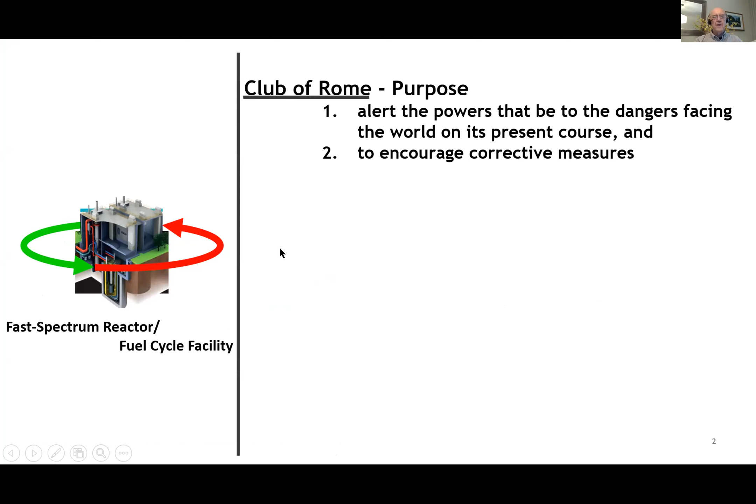I had to actually look up what the Club of Rome was and what its raison d'etre was, and there seem to be two aspects. One is to alert the powers that be to the dangers facing the world on its present course, and second, to encourage corrective measures. Now, I looked at and listened to a good number of talks, and it seems that the emphasis is more on number one.

Adam Fenech just last week talked about climate change and says we're screwed, there's nothing we can do about it. That seems rather dire. And Ruben Nelson, about a year ago, I think, talked about civilization overshoot, and the path that we're on is literally path to death of the world as we know it. Bill Rees, maybe about a month or so ago, talked about something similar, about civilization being the death of us.

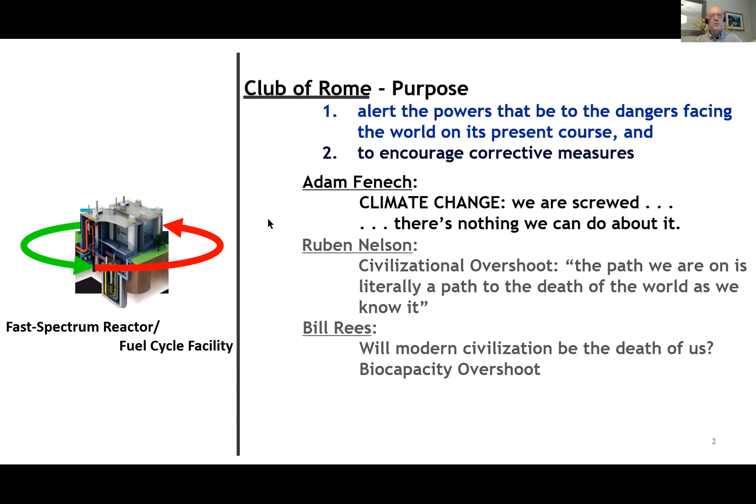And so I think I'm there as a foil, really, because I'm supposed to talk about number two, to encourage corrective measures. Fast spectrum SMR technology is sort of a neat way to get into it gently and to combat climate change in a massive way. And I would say, picking up on Bill Rees, that it's a quantitative substitute for fossil energy, except Bill Rees had already said, well, a quantitative substitute for fossil energy will simply deplete the planet.

And I think he meant of other resources. And so even that was turned into a negative. So perhaps what I can offer Bill is time, perhaps centuries of time where we as mankind can gather some wisdom before we die.

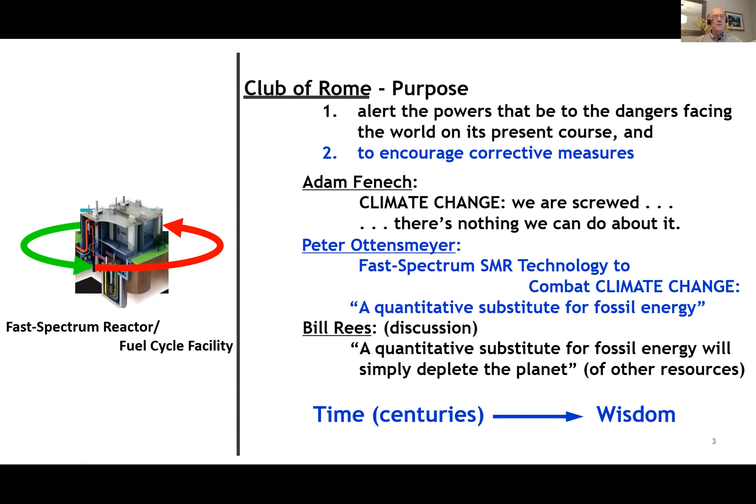So the outline of my talk is really talking about uranium, perhaps in a different way than you imagined, and about energy, because energy permits us to do things. And I've looked at energy really in three eras or ages over the last 4.5 billion years. There's the past, which was carbon neutral. And then for two centuries, we've really dug into fossil carbon. And hopefully the future will be relatively carbon free.

And SMRs, small modular reactors, and nuclear energy, I think, is the way to go to handle all of those problems. And I'll talk about slow neutrons and fast neutrons. What makes it possible really is what we call nuclear fuel waste. If we recycle it, it gives us a tremendous amount of energy.

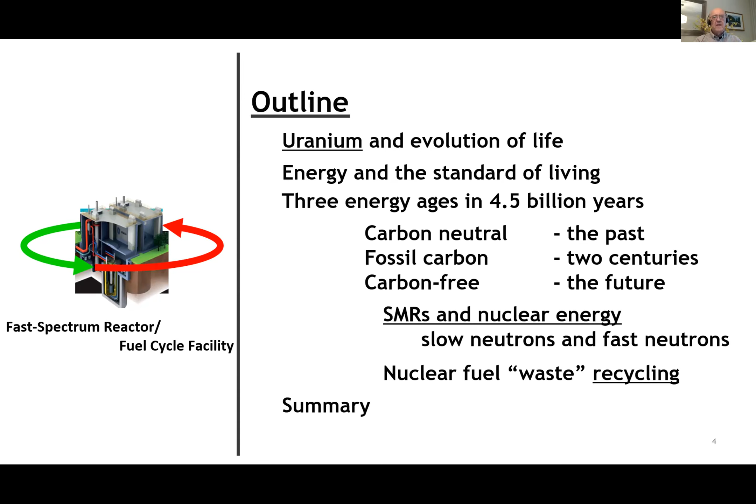Now, since some of it may be technical, I thought I'd start out with giving you the take-home message right away so that you can sign off and still have this ringing in your ears. You may or may not know that nuclear energy is really non-carbon energy, or very low carbon, non-carbon if you've already dug the uranium out of the ground, because all you're doing is putting it into a reactor and creating energy, and there's no carbon involved.

Now we've got 60,000 tons of used nuclear fuel, commonly called waste, but it's still 99.26% fuel, because we've only used about 3/4 of a percent of it to extract energy. Now, in some fast spectrum reactors, including SMRs, we can use the rest of it. And that helps us create over 5,000 years of non-carbon energy at the current nuclear power levels that we're using in Canada. And that avoids emitting 560 billion tons of CO2.

Now, if you don't know how much that is, about 3 trillion tons of CO2 are in the atmosphere. So this is about 18% of the CO2 just in the Canadian nuclear waste alone. Now, if we want to increase our power levels, then to replace, say, fossil energy in Ontario, we can do that for about 800 years.

And if we want to tackle all of Canada with that nuclear waste, then we can replace Canada's fossil energy for about 300 years. I think that's worthwhile going after. And the lovely thing is that the technology exists, has actually existed since 1951. The first electricity ever produced by nuclear power was in one of these types of reactors. And we've already accumulated $10 billion for nuclear waste management, which we can use as starting funds to go in this direction. So it's possible.

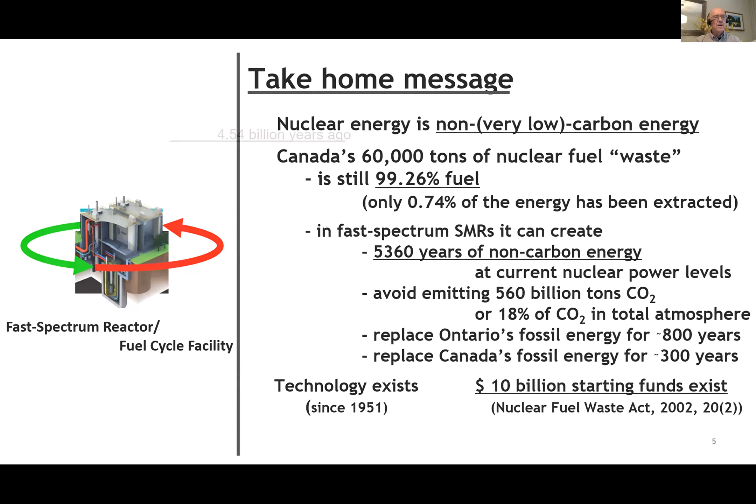But let me start at the very beginning. About 4.5 billion years ago, the Earth was formed from the fragments of some supernova explosion that sent bits and pieces of itself through space, and it glommed together to create the Earth. Now those rocks crushed together and created a tremendous amount of heat in the process. And so the center of the Earth now is actually at 5000 degrees, but it's still solid because the pressure is so great. It's surrounded by a ring of liquid iron and nickel. And then beyond that, we've got rock.

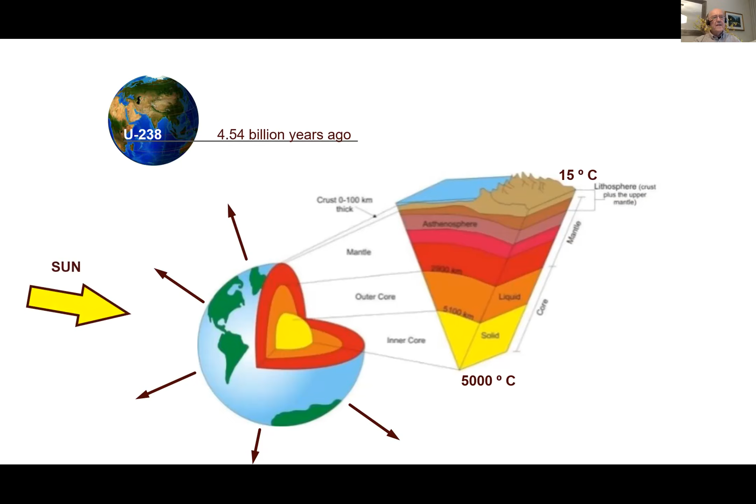And the temperature, of course, changes towards the outside, and it's about a lovely 15 degrees, which is good for life on the surface. But the Earth emits that energy, that heat, into space. And if it weren't for the sun, we would have sort of an icy surface. But even the sun is not enough. And what keeps it at that Goldilocks temperature really is the decay of uranium-238 and a bit of U-235 and so forth.

I'll just move your picture away so I can see what I'm doing.

That decay emits an alpha particle, which is really nothing more than a helium nucleus, like in kids' toys. And it emits about 3.3 million electron volts. Now, to compare that, a carbon combining with oxygen to give you heat gives you about 5 electron volts. So this is 1 million times more than that. So it's a tremendous amount of heat. And even the 4 parts per million in the crust is sufficient to do that.

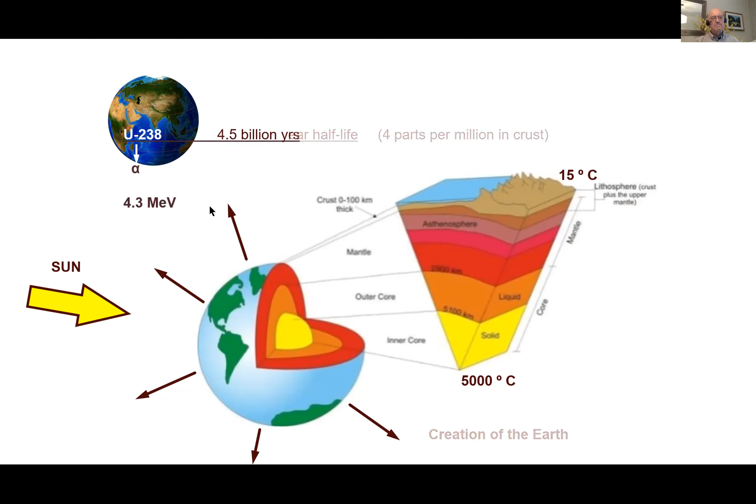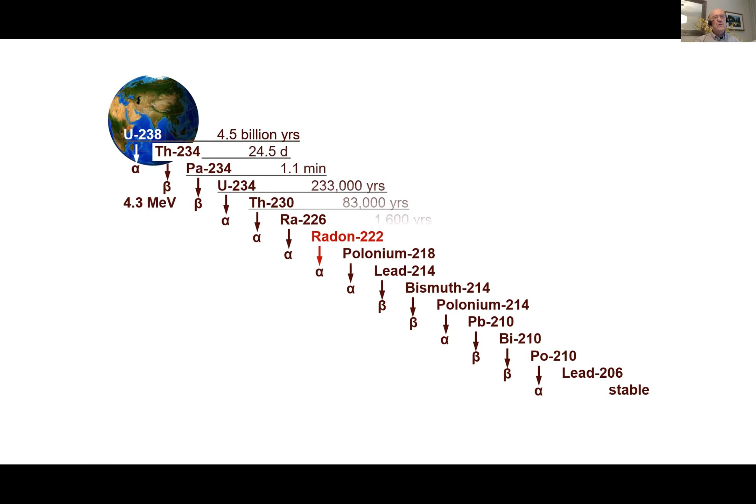Now, uranium is not alone, because in doing that, it becomes thorium, and then it becomes protactinium, and then uranium again at a smaller version, thorium and radium and radon, and so forth. It goes all the way to lead, which is stable, emitting energy all the way along. It doesn't do that immediately. It takes about 300,000 years, because there are some real laggards in there. The uranium and the thorium-230 together require about 300,000 years before this moves on. And so a single uranium disintegrating into something smaller takes about 300,000 years to become lead. And that's been happening for 4.5 billion years.

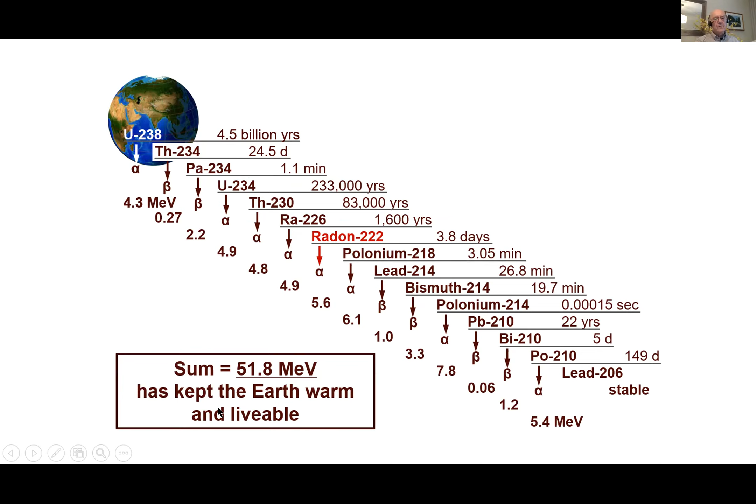Now, each of these, as they decay, also emit energy. And so altogether, we've got enough energy to keep the Earth warm and livable. And that's uranium. And if you think of geothermal heat, that's uranium as well. It's this chain here that gives you the geothermal heat. So it's radioactivity, you might say.

Now, in the middle, of course, there's radon, and you say, oh, radon, that's dangerous. It's in our basements and so forth in our houses. Well, it's been there for about 4.5 billion years. And we've evolved in that radioactivity, in the sea of radioactivity. And we've evolved defense mechanisms that keep us alive, because obviously we are alive today.

Now, if we look at it as a physicist, then today is right there. And then going backwards, the Earth was formed 4.5 billion years ago. The uranium we have now is about 99% U-238 in the total uranium and about 1% U-235. And 4.5 billion years ago, that's a half-life of U-238, there was twice as much there. So over the time, we've lost half of the uranium. And of course, it's going to be half again in another 4.5 billion years. But that was enough heat to evolve life.

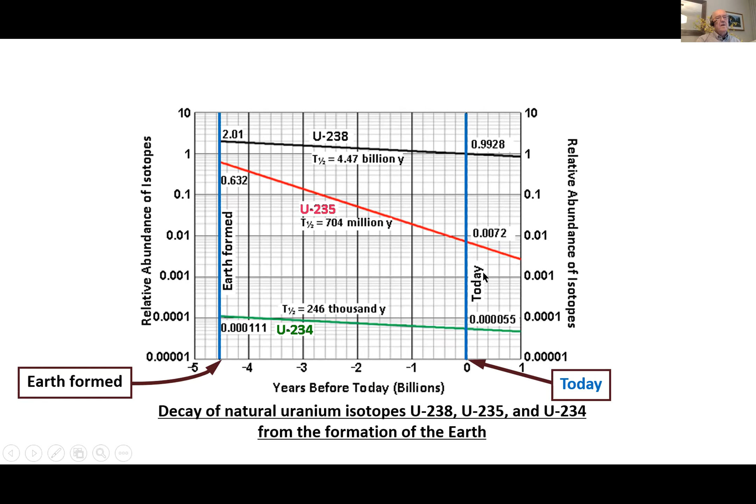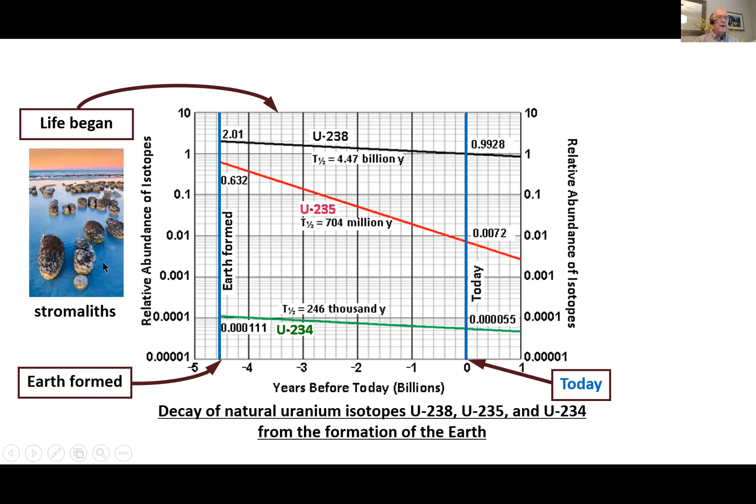Life evolved about a billion years after the Earth formed. And we've got evidence of that in rocks near the ocean. Australia, for instance, Shark Bay is a good place. And it's sort of like corals that have grown, because it comes in layers and layers and layers of cells that glom together to form, like I say, something like corals.

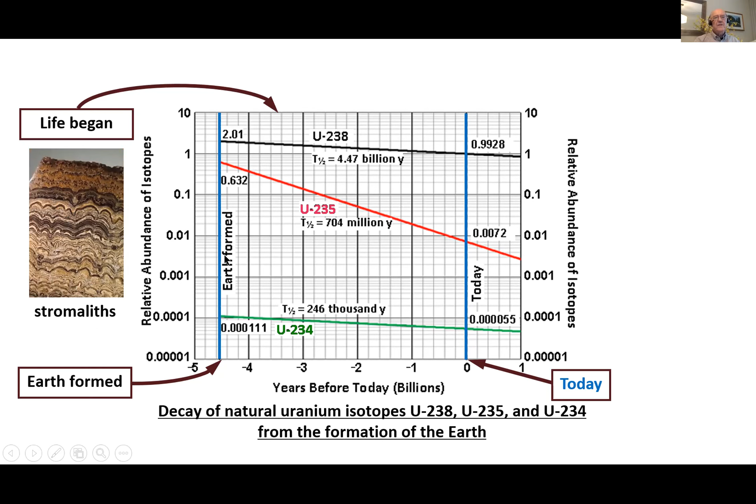Mankind actually is a rather recent arrival, because we evolved into something called man just fairly recently on this time scale. And so you might say our existence is due to those lovely conditions that uranium caused on the surface of the Earth.

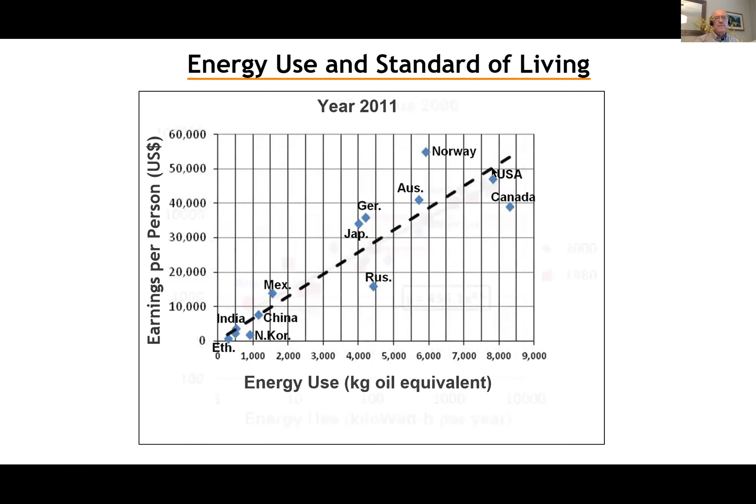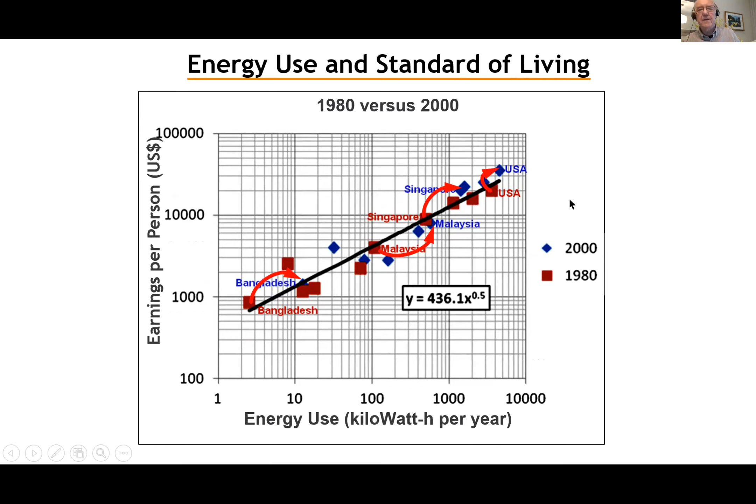Here are some nations, Bangladesh and Malaysia and Singapore and so forth, which in 20 years increased their use of energy and increased their so-called standard of living for each of them. And even the USA improved in 20 years there, between 1980 and 2000. But that's been happening for eons.

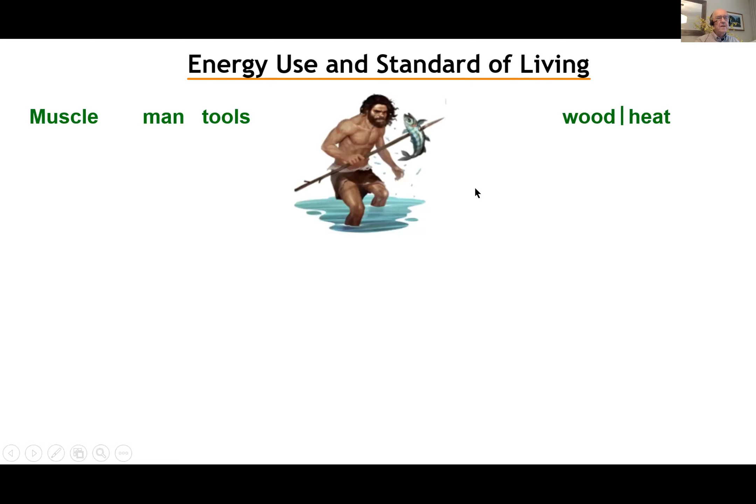And our good man here, all he had really was his muscle energy to start with. But he also had a brain, and that brain evolved tools, and his standard of living went up because of it. But then he realized that if he multiplied his muscle by using animals, his standard of living would increase again. And when we invented machines like ramps and levers and wheels and wagons and gears and winches and blocks and tackles, our standard of living just soared.

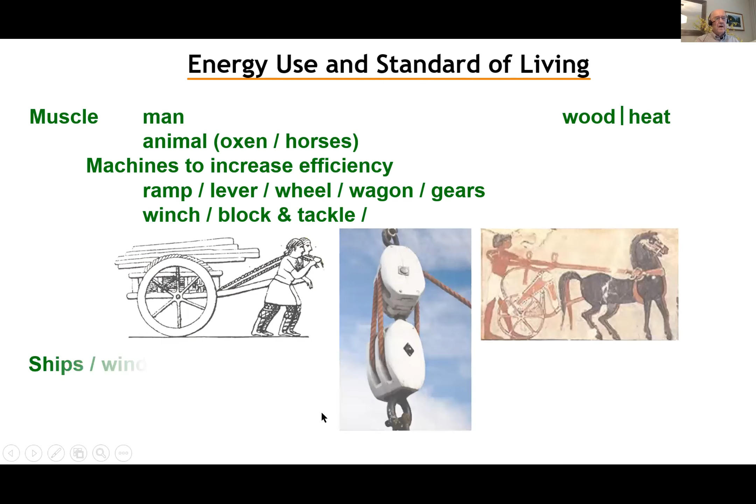I like blocks and tackles because I'm sort of a nautical person. Because it let us build ships and windmills and water wheels, and life just became lovely. I mean, it's almost nostalgic when you see these sailing vessels there using wind power. Well, it was dangerous,

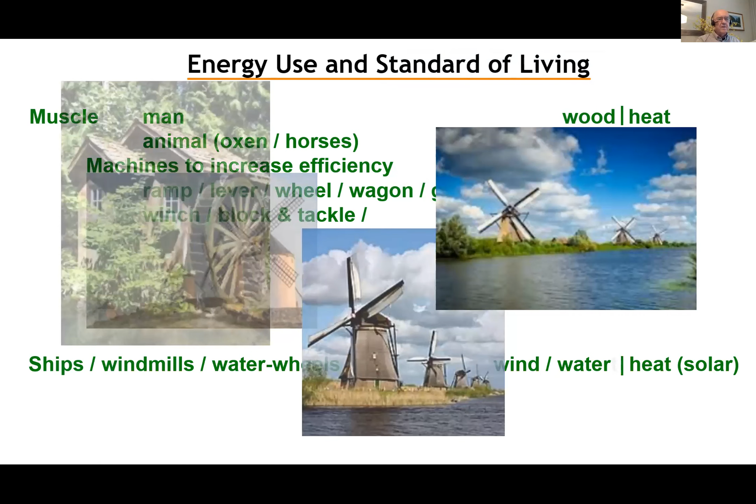but windmills have been around for a good long time, and we're trying to go back into that with what we call now turbines, and water wheels are just lovely to play around with as well, and they gave us our motive power, and that was all in what I call the carbon neutral era.

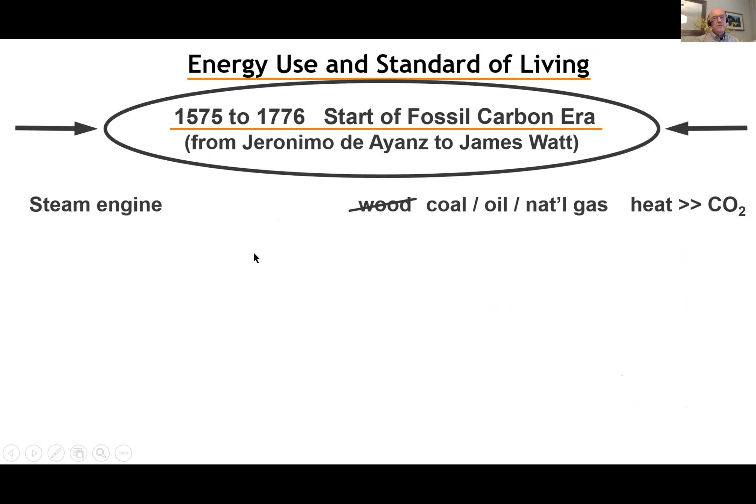And that ended somewhere around 1500 to 1800, because somebody used their brains, in Spain Jeronimo de Ayanz and James Watt in England, to invent the steam engine. And that changed our life. Wood wasn't good enough, we used coal and oil and natural gas and so forth, and we conquered the world on land.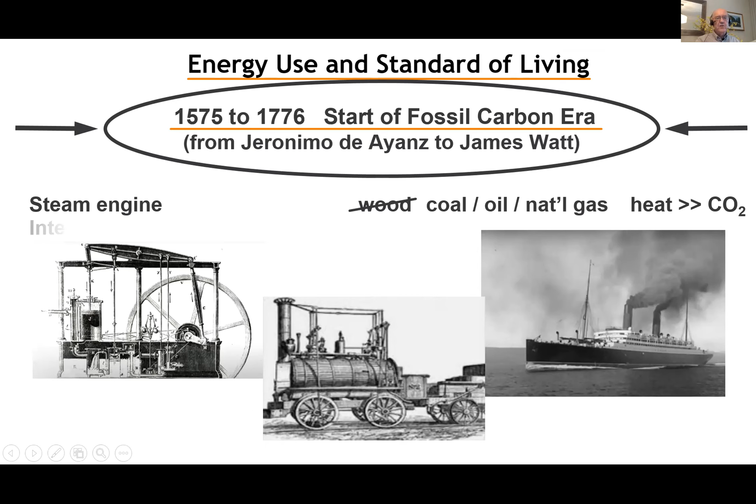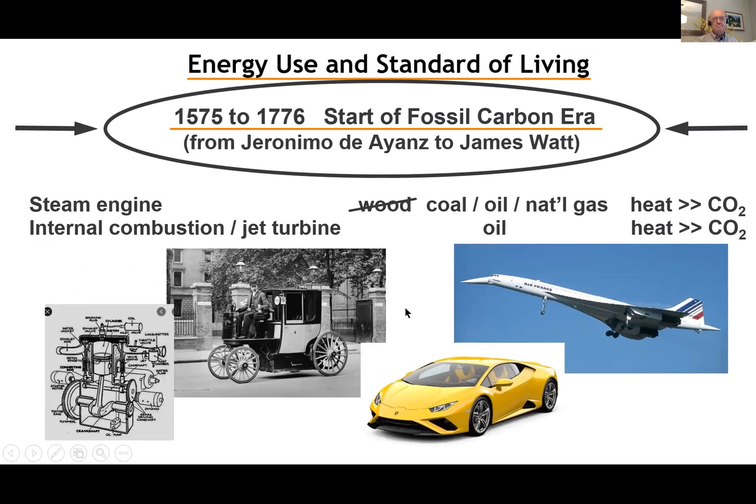It went faster. We invented the internal combustion engine and the jet turbine and so forth, and we flew into the air. That's the Concorde, if you remember that far back. And you figure when we invented electric motors, then things should get better. Well, a little bit if we use hydropower, but most people don't have hydropower, and so they create electricity with coal and oil and natural gas.

And all of that, of course, emits carbon dioxide. How much have we emitted into the atmosphere since the 1800s, since James Watt's invention? Well, there are tables that you can look up for each country and so forth. And the world altogether by now emits about 35 billion tons per year of CO2 into the atmosphere. And altogether, since the 1800s, we've emitted close to 2 trillion tons of CO2.

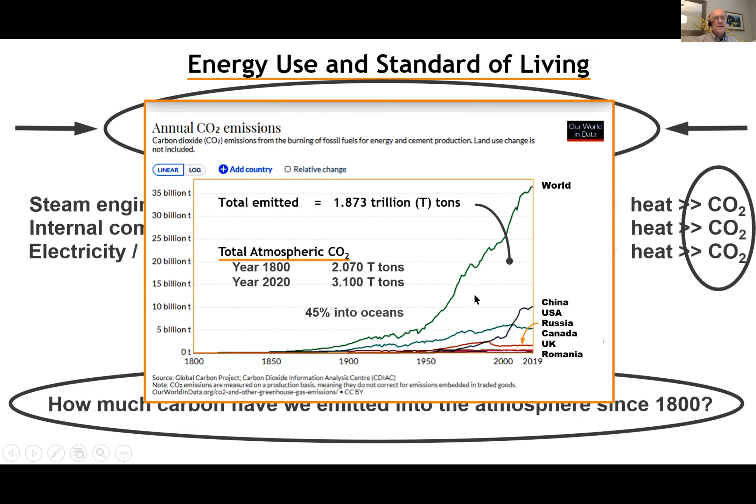Now, is that a lot? Well, in 1800, the entire CO2 content in the atmosphere was about 2 trillion tons. By 2020, it was 3.1 trillion tons. You figure, well, it should be 4. Well, the rest of it went into the ocean and acidified the ocean. And so we started thinking about that and wondered whether it had ever happened before.

Well, obviously there were some sort of natural phenomena where the CO2 went up and down and the temperature sort of followed in concert, but nothing has happened that's as drastic as what's happened recently. And so instead of Homo sapiens, which arrived somewhere around 200,000 years ago, now we've got maybe Homo insapiens, or if we want to be kind, we'll call him Homo carbutilus, like carbon user.

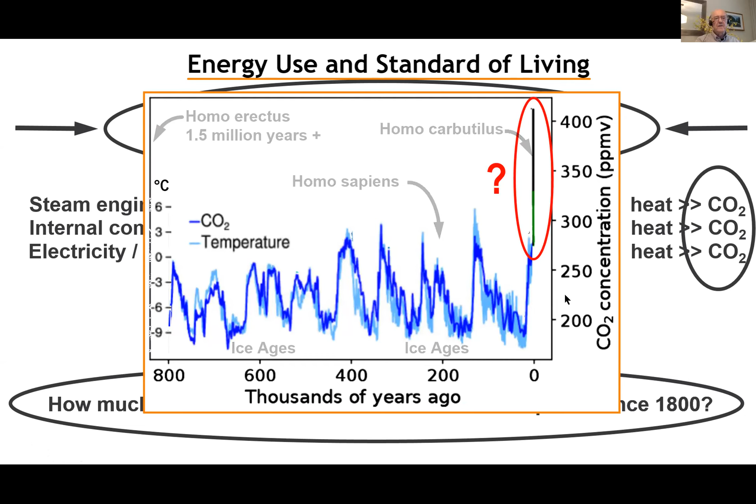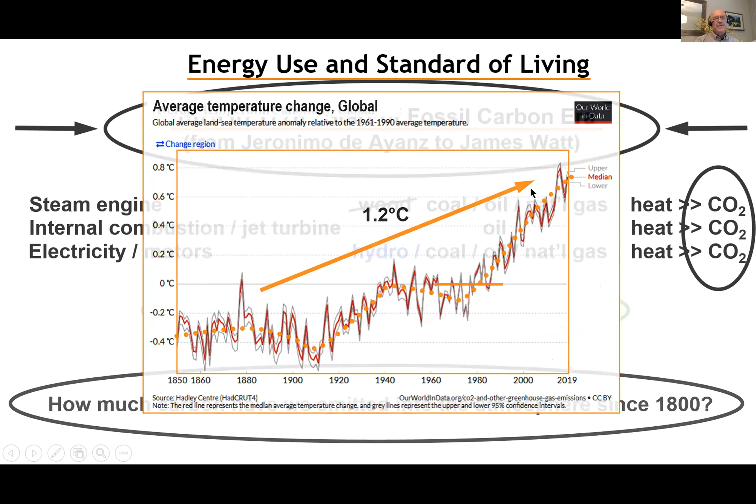And the Germans invented this word, Energiewende, or energy transition. And you think that Angela Merkel was the instigator of this. Well, it actually happened 30 years before her. She called it Energiekonzept. And the idea was that you would do away with carbon, but really the German population was after doing away with nuclear.

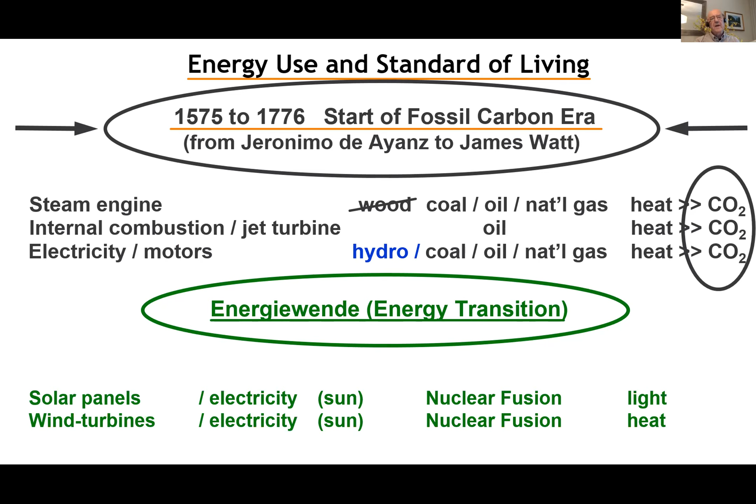And so in the process, they've been spending about 35 billion euros per year over the last 10 years. And the effect was to lower their carbon emissions for electricity from about 500 grams of CO2 per kilowatt hour to about 400. Ontario, in the meantime, is down to 31 grams per kilowatt hour.

So we're doing rather well, and we do that primarily on the basis of nuclear fission. 60% of our electricity comes from nuclear fission from our reactors. Now, nuclear fission is a relatively new phenomenon in the greater scheme of things on that geological timescale.

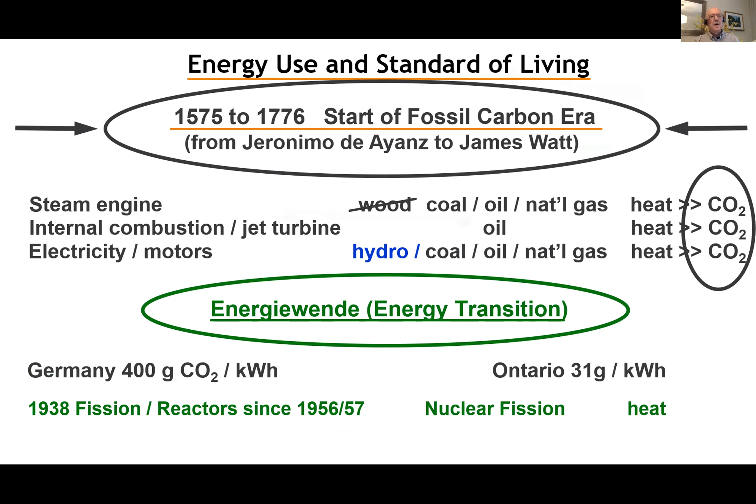It started in 1938 when Otto Hahn and Lise Meitner and Fritz Strassmann and Otto Frisch, a relative of Meitner, found that what they had done in the lab was split an atom, a uranium atom. And you say, oh, that's nuclear physics. I can't understand that. Well, if you've ever played pool, then you know half of nuclear physics right there.

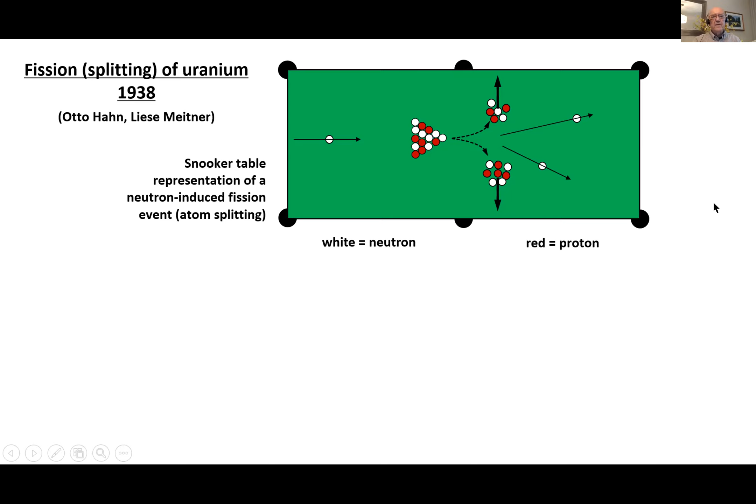Because you slam this white ball, which is called a neutron in nuclear physics, into an atom, a large atom, and you have to be rather skilled on the table here to get it to break in such a way that you've got 2 nice clusters there, and then 2 more white balls or 3 fly off as neutrons into the distance. Well, in the nuclear reactor core, that's exactly what happens, except it's a three-dimensional pool.

And so the neutron slams into, say, a uranium atom, and it splits that atom, and out come two smaller atoms. I've called them krypton and barium here. That's approximately right. And they fly apart with the order of 90 mega electron volts.

And this event, even though it sounds like it's a lot, it still takes about 150 billion of these events to give you 1 calorie of energy, which if you remember from your high school days means that it can heat 1 centimeter cubed of water 1 degree Celsius, okay? So a single fission is a tiny amount of energy.

And that's nuclear energy. And what is nuclear energy? Well, it's really the energy that's stored, but it ends up being kinetic energy when these things fly apart with tremendous speeds, the order of 12,000 kilometers per second. But they're so large, they don't go very far because they're inside a crystal. And so they bump into atoms and they give that energy off as heat, vibration of those atoms. And that's what we use.

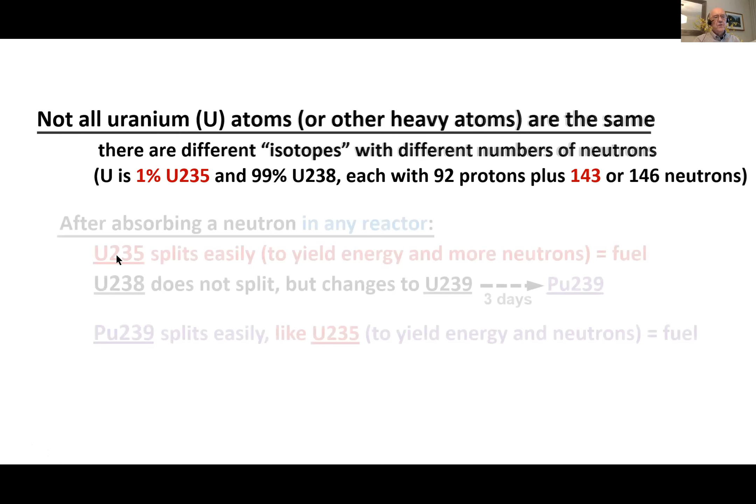Now, I should say that not all uranium atoms are equal. There are different so-called isotopes, which all have the same number of protons that makes it that kind of atom and different numbers of neutrons. Now, uranium is 1% U-235 and 99% U-238. And that has consequences because in a reactor, U-235 splits very easily to yield energy and more neutrons. And that keeps the reaction going. And this is usually called fuel.

U-238, even though it's 99% of the thing, does not split, but changes to uranium-239 when it absorbs a neutron. And it's kind of uncomfortable as a nucleus and jiggles and spits out a couple of electrons and becomes plutonium-239 in about 3 days. Now that's useful because plutonium-239 splits just like U-235 in the reactor to yield energy and neutrons. And so that's also fuel.

And at the end of a run in a CANDU reactor, we get about half of the energy from plutonium-239 as we do from uranium-235. Now, the problem, of course, for an engineer is that all atoms in the entire structure absorb neutrons. And so one has to be wise in how to construct these reactors to use the neutrons efficiently. And people do that in many, many different ways.

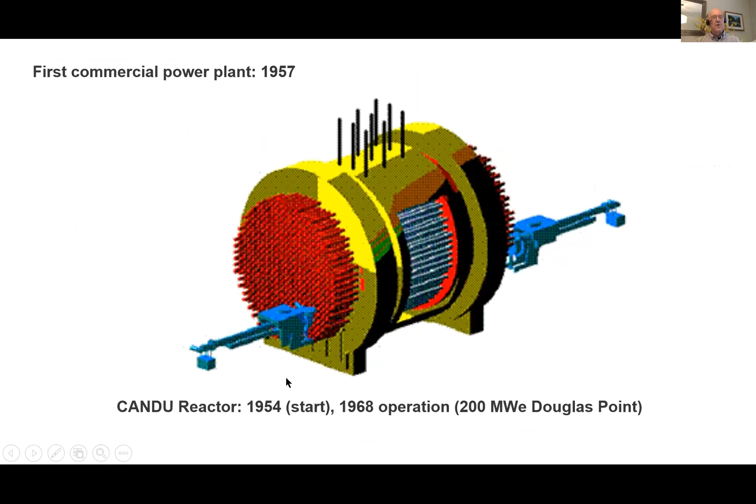Now, if we look at a reactor, it's really a very, very simple device. It's a barrel full of water, which has tubes in it which contain the fuel. And so if we look at this, it's surrounded here by a protective shield so that airplanes don't fly into the thing. But otherwise, it just makes it look pretty. But it's a heater. That's all it is.

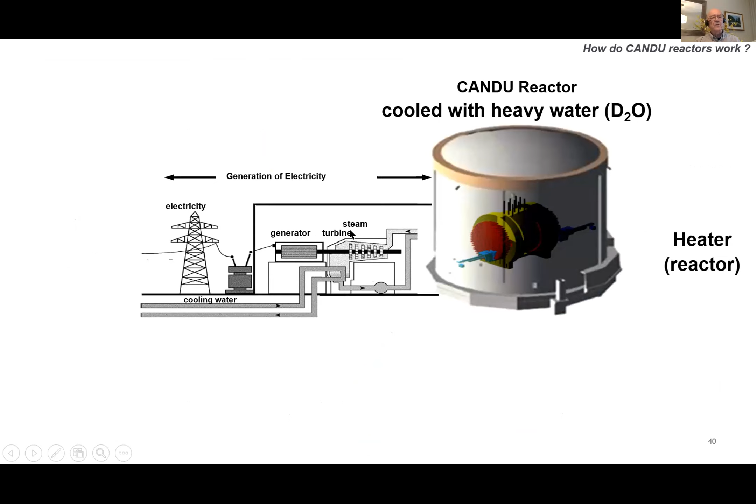It creates heat, and that heat creates steam, which creates electricity. End of story, you might say. Here you see the tubes there, and these tubes here are big enough that they take CANDU fuel bundles.

Now, a CANDU fuel bundle is one of these tubes which contain pellets of uranium, and it's handled by a person because it's not very radioactive. He's got gloves on because he doesn't want the carbon in his sweat to end up in the reactor, because the carbon-12, the normal carbon, turns into carbon-14, which becomes radioactive. So you've got to keep it clean.

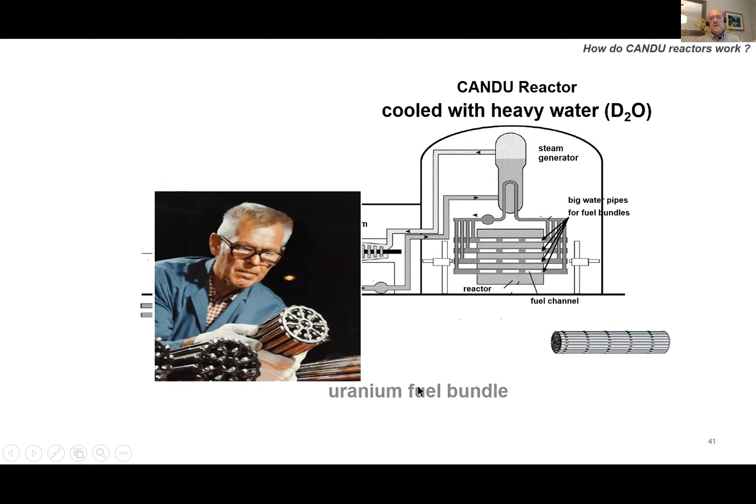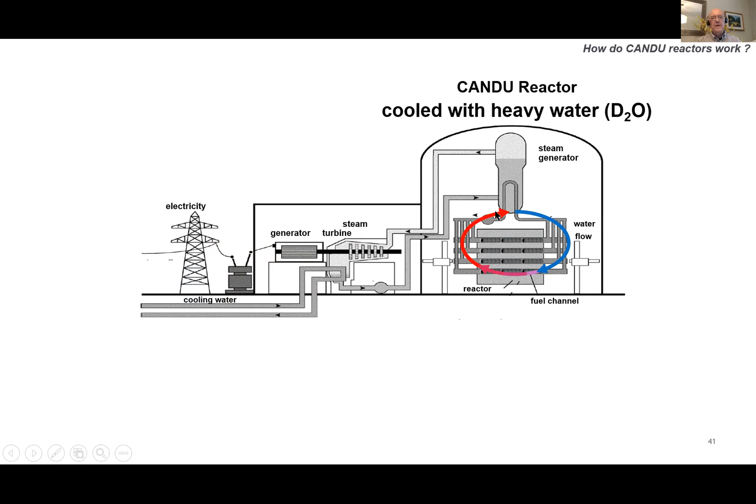But that gets put into the reactor like that with a fueling machine, and then we close the tubes and put water through them, and the water heats up and becomes so hot that it can create steam in a steam generator, which then turns the turbine and creates electricity.

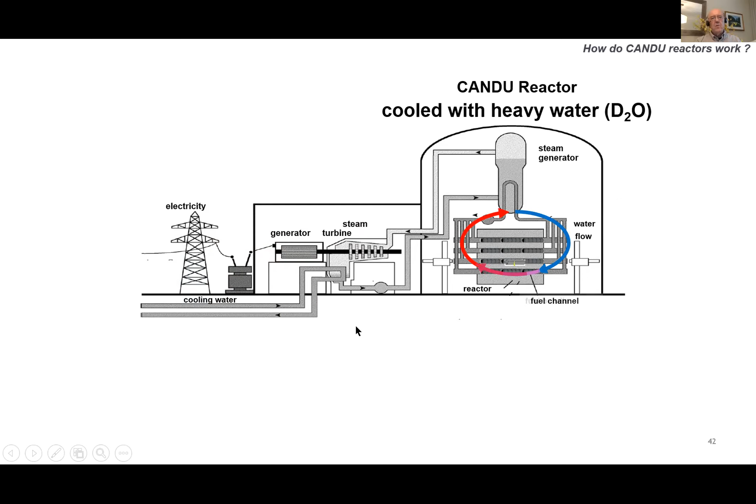It's a very simple device, but we want to really look at how to use that uranium better. And so we're going to look at the fuel bundle and take out one of the pellets, and it looks roughly like that. It's not quite as long. Here's a real picture of it. And it says that about 6 to 8 of these pellets contain enough energy to cover the electricity needs for an average household for a year.

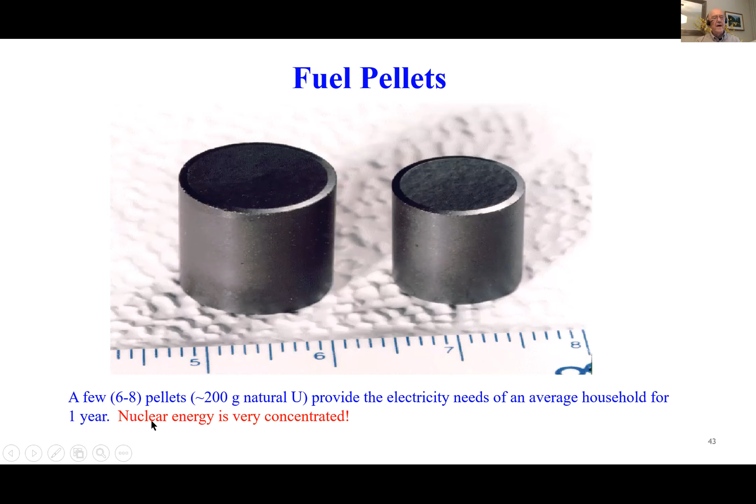Now that's in normal reactors. In the fast neutron reactors, you can multiply that energy yield by about 100. So you might say these 6 or 8 pellets take care of the electricity needs for about 100 years. That's a tremendous amount of energy.

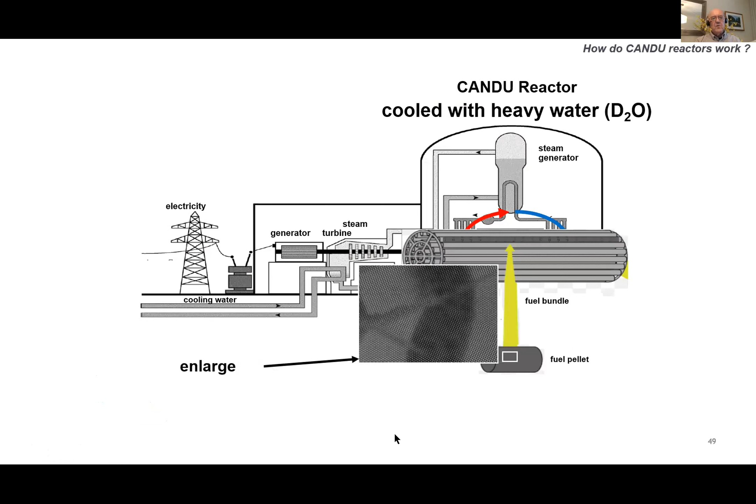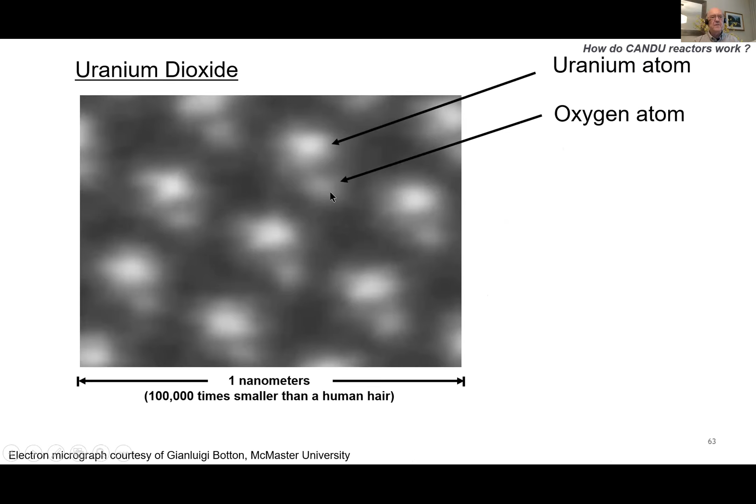And it all comes really from the fissioning of, I'm going to show you some uranium atom images from an electron microscope. And it's been enlarged to such an extent that this distance here is about 100,000 times smaller than a human hair. It's called 1 nanometer or 10 angstroms. And the brighter image here, slightly distorted because we don't have a perfect lens to image, is a uranium atom. And this is an oxygen atom, except it's 2 of them, one over top of the other.

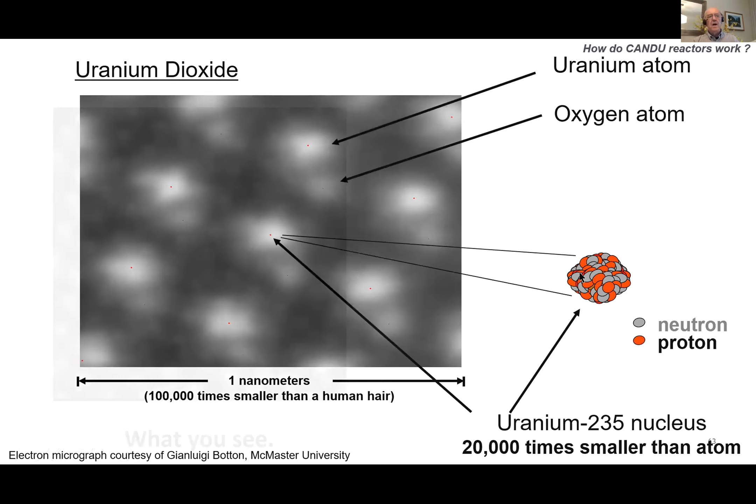But we're interested in the nucleus, and the nucleus is about 20,000 times smaller than this entire atom. And so we can't take a picture, but here is a representation of this nucleus, which of course is in the atom that's in the fuel. So here is the fuel again, and it's filled entirely with these atoms. And I've shoved all of the uranium-235 atoms up into the upper corner. They're of course spread throughout this.

And in a conventional reactor, we use slow neutrons because slow neutrons look at U-235 and they think it's a big balloon. And so they find that much more efficient to split than the U-238 that's in there. So while we see this, the neutron really sees that thing like this, where out of 100 neutrons, about 55 will fission that little bit of uranium-235 that's in the upper corner.

And another 10% are just absorbed as the U-235 becomes U-236. And the rest of the neutrons are absorbed in U-238, which eventually becomes plutonium-239, which then acts like additional fuel, which is great. Now, the CANDU reactor uses about 3/4 of the fuel amount that's in the uranium.

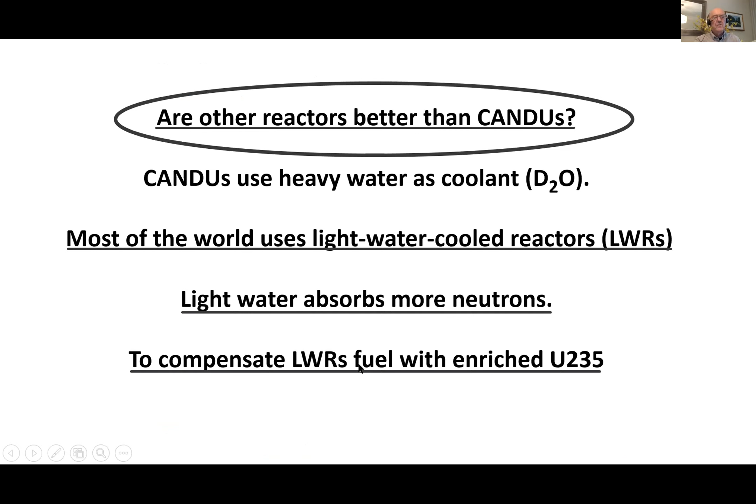Are other reactors better than the CANDUs? CANDUs use heavy water because heavy water doesn't absorb neutrons very well. Most of the world uses light water reactors, which do absorb neutrons, and they compensate for that by having to enrich the U-235, give the neutrons more U-235 to hit, because there are fewer neutrons because some get absorbed by the water. So instead of only having 1% U-235, you have about 3 to 5%.

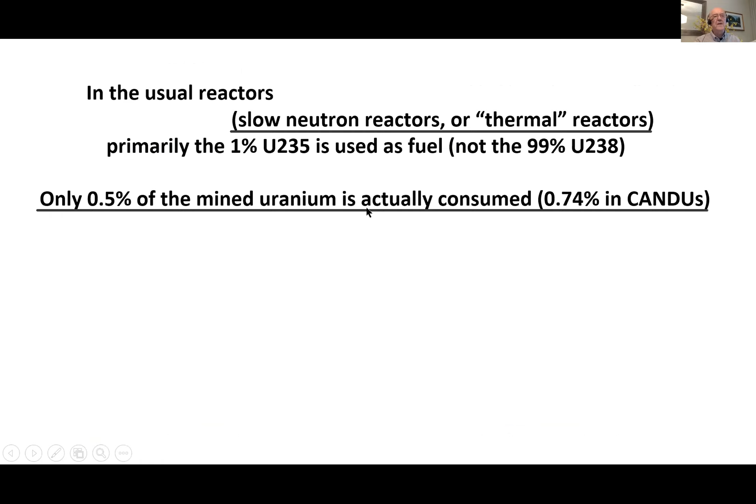So basically the fuel here is mostly just plain U-235. And that's 1% in mined uranium. And that's serious because in the other reactors, other than CANDUs, only 0.5% of the total mined uranium is actually consumed. And according to the World Nuclear Association, the Canadian uranium reserves will run out by 2050 because of this inefficient use. The reactors just say, give me uranium and I will use less than 1% and I'll throw the rest away. This seems like a terrible way of doing it.

And even though we have potentially up to 500,000 tons of uranium, we're mining and exporting it at about 12,000 tons per year. And three years in a row, we had 16,000 tons per year. And that basically means that this will only last on the order of 30 years before we run out, even for CANDU reactors. That's the year 2050. I won't quite live that long, but certainly my kids and my grandchildren will. And so is that the end of nuclear power?

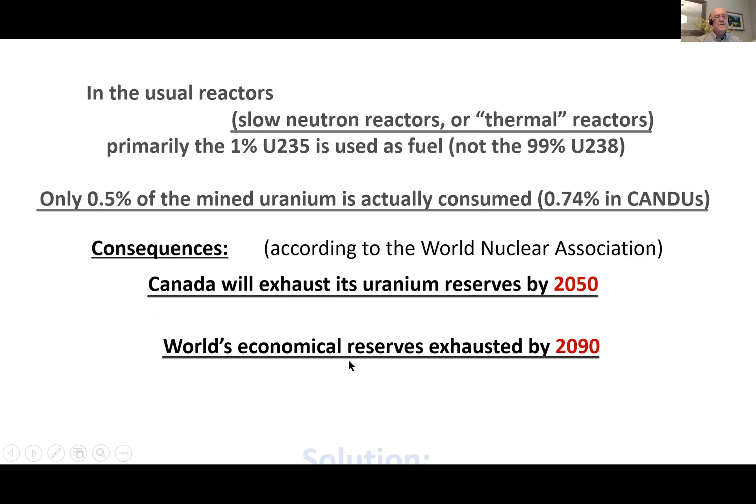You say, well, what about the rest of the world? Well, if you take all of the world's economical reserves, they will be similarly exhausted by about 2090. That's a bit better, but still, it's not very satisfactory. So you might say that that's my part one of the Club of Rome raison d'etre. But there is a solution.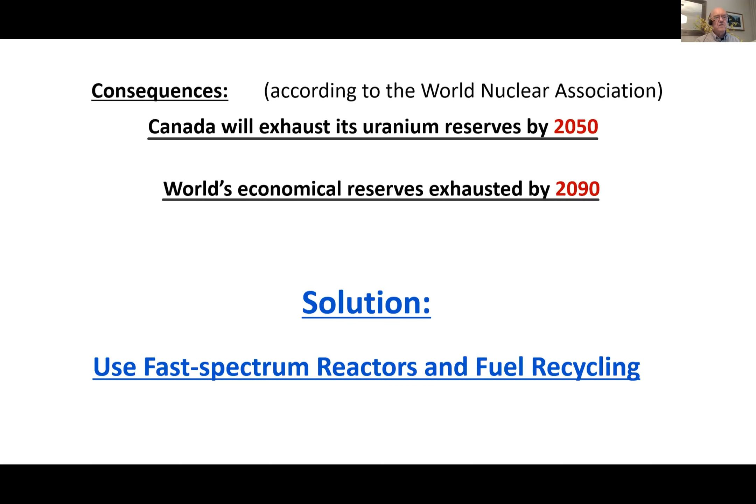We can use fast neutron reactors and fuel recycling. And there, amongst these small modular reactors, there are some which are fast neutron reactors. This one here is the version from Moltex, which is undergoing a change in design at the moment, so I really can't say very much about it. And there's this one here, Advanced Reactor Concepts, I misspelled it, should be ARC. And there's the Prism by GE Hitachi. Those are the fast neutron reactors.

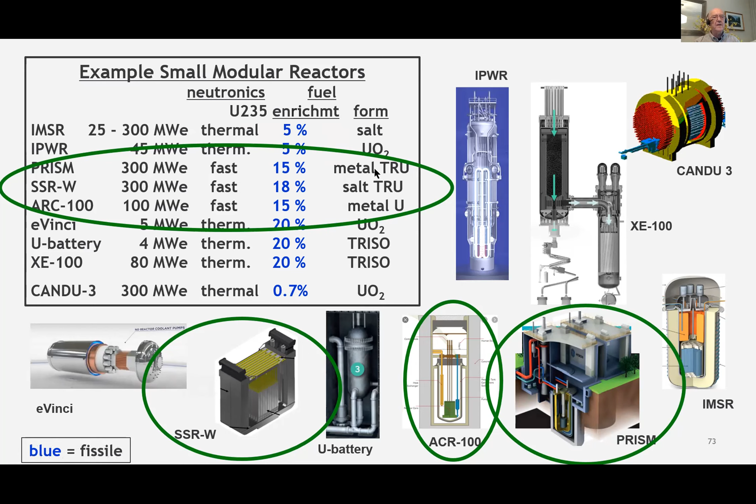Now, fast neutrons don't interact with U-235 very efficiently, and so we need to increase that concentration for them to work. But the lovely thing is that they then interact with uranium-238 about 50% of the time, which means that while we get enough neutrons and energy out of this, for every uranium-235 atom that's used, one of these U-238 is converted into Pu-239, and that becomes fuel and replaces that. And so effectively, we're just taking U-238 and putting it into fuel and then creating energy from that.

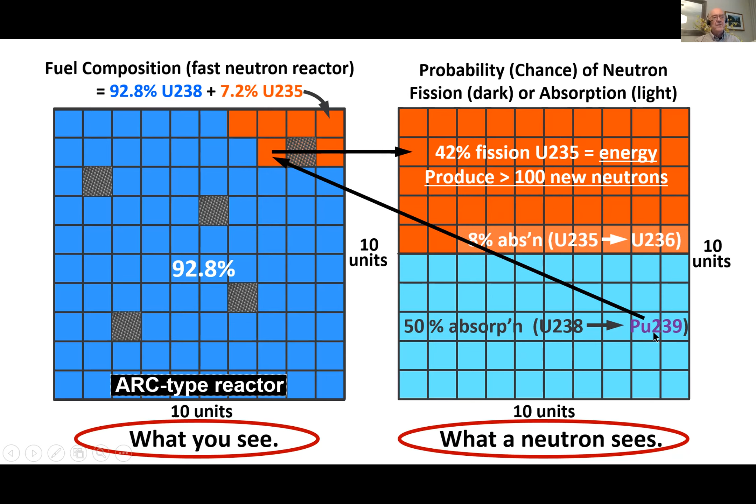And you say, well, why don't we start with plutonium-239? Because we can do that. And where do we get it? Well, we can get that from concentrating CANDU fuel waste because it has plutonium in it that we can use as starting fuel in this scheme. If we start out that way, then essentially we can even convert more of the U-238 into plutonium-239, which also goes into plutonium-240 and 241 and 242 and so forth, because you're probably going to ask me about plutonium.

And here, this process is actually even more efficient in terms of converting this plutonium-239 into energy, while at the same time the U-238 replenishes that plutonium-239, and even the rest of the plutonium replenishes and creates more plutonium-239 and other plutoniums that we can use even in other reactors.

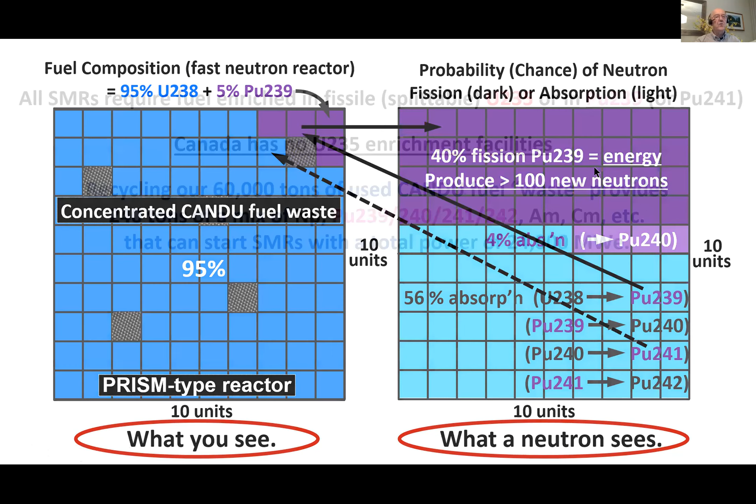Now, in terms of using U-235, Canada has no U-235 enrichment facilities. The only countries really that have them to a large extent are countries that build atom bombs. Canada has decided not to do that. But we do have plutonium as a mixture with other heavy atoms in our fuel. And our 60,000 tons of CANDU fuel provides about 240 tons of useful starting material to start about 24,000 megawatts of reactors. That's more than 2.5 times the nuclear power that we have currently. So that's a tremendous amount of starting fuel.

And this material is actually the long-lived worry in nuclear fuel waste. It's radiotoxic for close to 1 million years. But if we take this out and put it into these reactors and consume it, it's gone. And so this approach actually eliminates the long-term million-year radiotoxicity of our stored used CANDU fuel in our stockpiles. So I just love that aspect of it. We get energy and we eliminate the radiotoxicity.

Now, I've said that recycling maintains the fissile component, and I indicated how that's maintained by changing the U-238 into fissile components or splittable components. And it permits fueling with U-238, which is the basic starting fuel then, for many centuries. Now, what does many centuries mean? Well, our 60,000 tons of used CANDU fuel took about 40 years to accumulate. And during those 40 years, on the average, we created about 10,000 megawatts of power. And we've only used less than 1% of this fuel.

And the rest, 99.26%, is left. And that can be used in fast neutron reactors and used completely. And so you might say, we still have a potential of 0.9926 divided by this 0.74, which is 134 times more energy.

And since we accumulated that in 40 years, we have enough at this power level to last us 134 times 40 years, which is over 5,000 years at this power level.

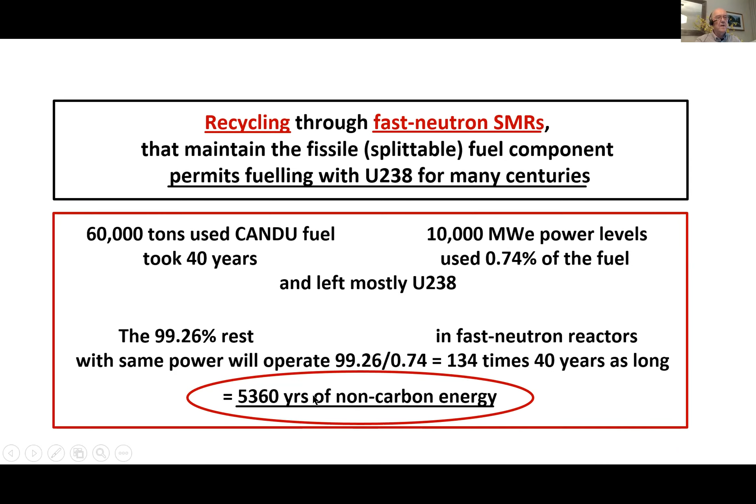This is huge. Now, I won't go into reuse and recycle, except to give you some idea of costs, which are on the right-hand side in the next slide. There are different ways that you can recycle. Purex is one of them. Pyroprocessing is another. Fluoride volatility methods, and they have different costs. Purex is the most expensive and also the most messy. Pyroprocessing is very clean, and fluoride volatility is about the same price.

Now, how does one compare that to actually just getting rid of the fuel bundle by burying it? Because also that costs money. We've been paying from our electricity bill into the fund to do that. And by now we've got about $10 billion in that fund. And that's from about 2.8 million bundles of used fuel. So per fuel bundle, we've got funds that are about $3,600 just to bury it, to get rid of it. This huge energy resource. And that's about 3 times more expensive than actually processing it using pyroprocessing or fluoride volatility.

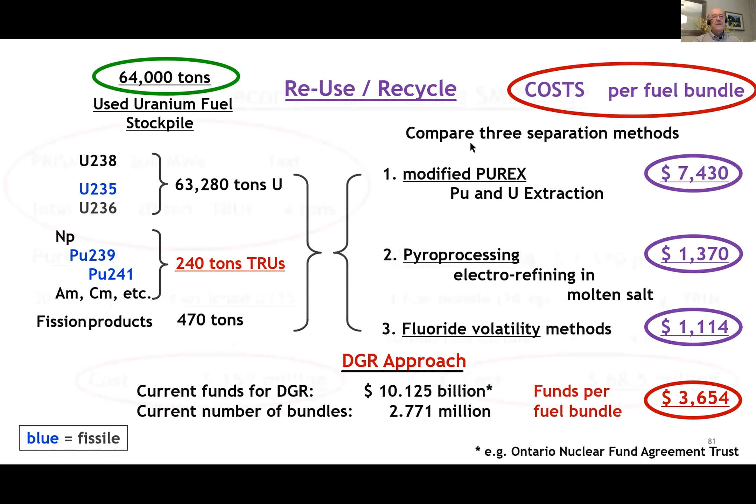And you say, well, but is it economical even then to make new fuel? Well, we can buy new fuel from the United States if we buy enriched U-235. And say for one of these reactors at 300 megawatts, it needs a total charge of 20 tons, of which 4 tons are these transuranics, which is plutonium, neptunium, americium, and so forth as a mixture. And instead of using that, we use U-235 and it costs us $150 million. If we use pyroprocessing, we can produce the same fuel for these reactors for less than half that price. And so it's economically viable to do that.

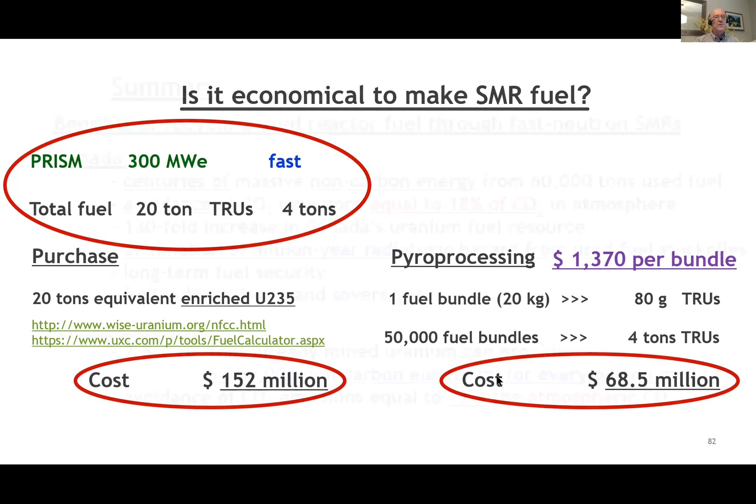So let me summarize and give you the benefits of recycling used CANDU fuel through fast neutron reactors. It gives us centuries of massive non-carbon energy from the 60,000 tons of used fuel that we've got sitting there. We don't even have to mine it. And it avoids CO2 emissions equal to almost 20% of all of the CO2 in the atmosphere. That's useful. It increases our uranium resource by the order of 130 times. And it eliminates the million-year radiotoxic hazard from used fuel.

It's long-term fuel security, and it's indigenous. It's our own. We don't have to buy it from anyone. So that if somebody like Trump comes along and says U-235 is a strategic material, I won't sell it to you, well, we can say, well, we've got our own. We don't need U-235.

And if you extend that to the globe, by now we've got almost 3 million tons of already mined uranium that's sitting there as used uranium and depleted uranium. That's enough using this approach to create $300,000 worth of non-carbon electricity for every person on Earth, man, woman, child, and baby. That's tremendous. And if we go in that direction, that would avoid CO2 emissions equal to 7 times all of the carbon dioxide that's in the atmosphere now. So we can think of actually perhaps using some of this energy to get some of the carbon dioxide out. It's there for our taking.

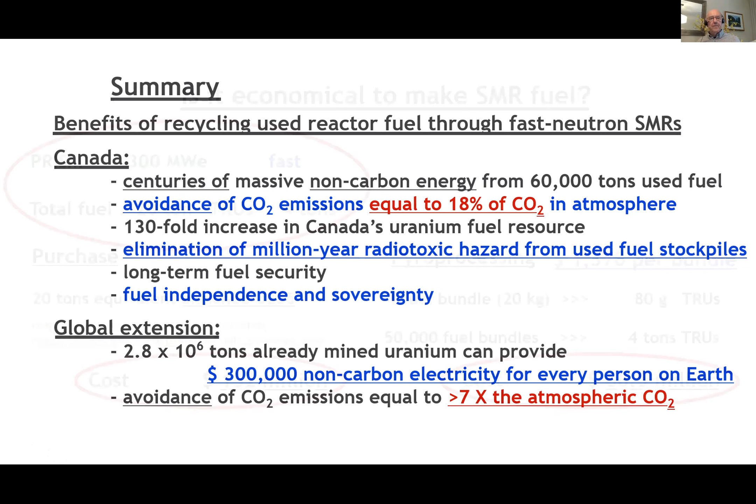So what do we need for this? Well, we need a reactor that works with a spectrum of fast neutrons. Slow neutrons just will not do this. You need some reactors which have what's called in the jargon a conversion ratio of 1, which means that for every fuel atom that you use and split, you create another one in the process from U-238. And the fuel form that we use should permit easy recycling. Whatever you use, combine it with a recycling method that gives you a minimum of extraneous processing waste, because you don't want to create more problems than you're solving.

And you say, is this sort of pie in the sky? Well, no, it's not, because these fast spectrum reactors exist, and they have a fuel form. For instance, the metal fuel form that's enriched with transuranics. That's the plutonium, neptunium, americium, and so forth. And the PRISM-like reactor from GE Hitachi will do, and the ARC-like reactor from Advanced Reactor Concepts, the company.